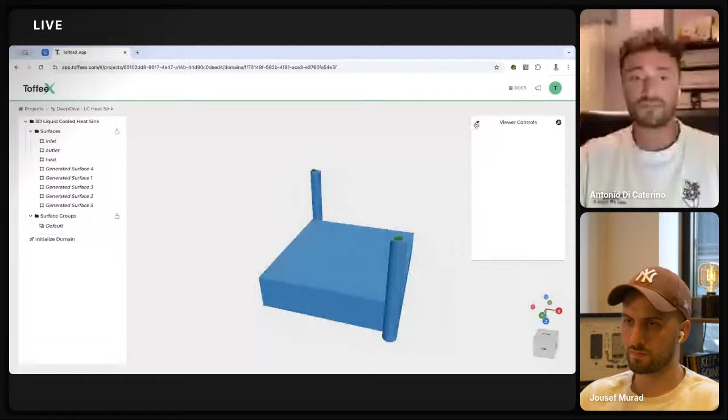As you can see here, I have two different domains and two different toolboxes. If I click on the domain, you will see that fundamentally what you need to provide as an input is a very simple shape. In this case, we are providing the outline of a liquid cooled heatsink, how it would look like. The domain that we have uploaded is fundamentally a triangulated mesh file. The input that typically needs to be provided into the software is an STL file, which can be exported out of any CAD system nowadays.

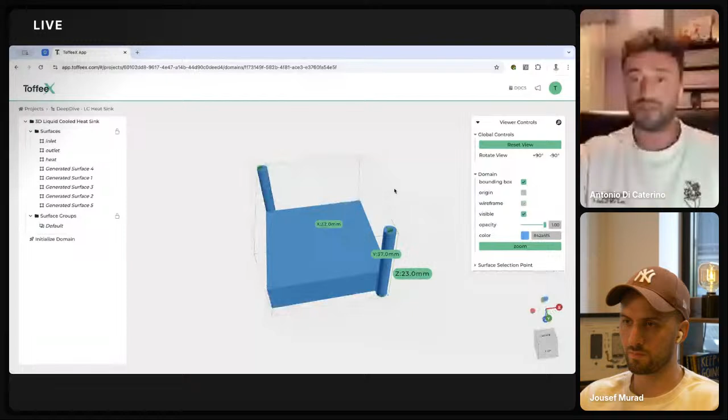Here you can see it's a very small geometry, smaller than 5 centimeters per side. So it's a very small liquid cooled heatsink to cool down a CPU. What we identified here are a few basic regions or surfaces that will be used to set up the physics simulation problem.

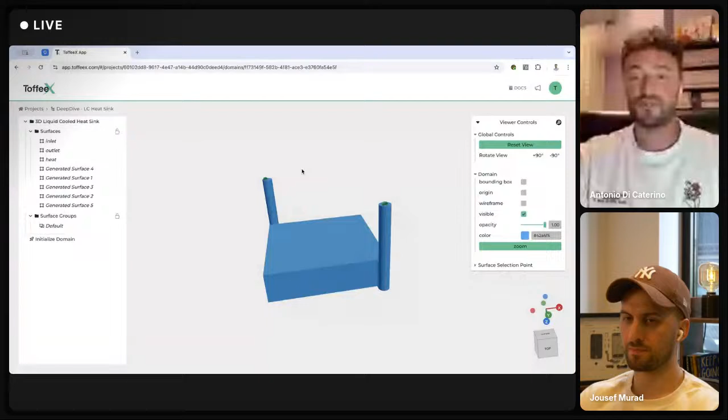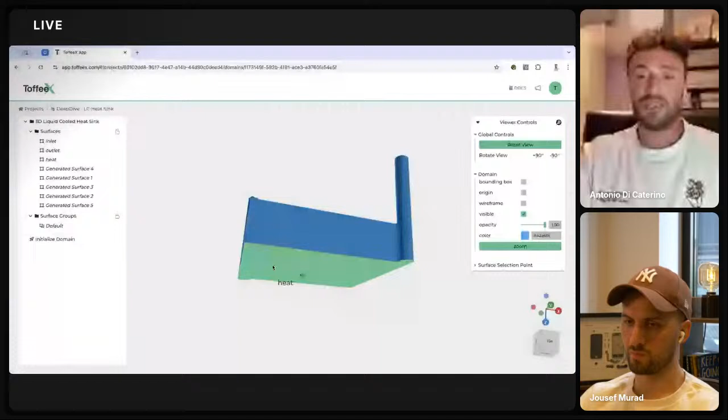As I was mentioning before, the software is physics driven, so we need to describe the physics to tell the software how the part is behaving, how it's performing, and to inform the optimization process to go in the right direction. In this case, we had to define an inlet region that you can see here, with the surface being highlighted, an outlet region on the other side, and then we also specified the region from which the heat is applied. In this case, the power coming from a CPU.

Once we have defined our domain, we go back to our project page, and what we have to do is build a toolbox. A toolbox is what I would define as the main operational environment within the platform. It contains all the tools that you need to perform either simulations or design optimization. To start, it's very simple. You click on create a new toolbox. You can give it a name, let's say deep dive toolbox, for example. And you select the domain that you want to use to run this design optimization.

Here you have some physics models that you can select. In this case, we will be solving both a thermal and a fluid problem, so you can select thermal fluid and click on create. I don't want to take too long to show how the creation of the toolbox and of the optimization works, but fundamentally what you have to do is create one run, which is a design run in our case, because we are expecting the software to output a design at the end of this process. We can give it a name, and we can set up settings for design, simulation, and mesh. Because again, the software is simulation driven, so we need an underlying physics simulation to inform our optimization process.

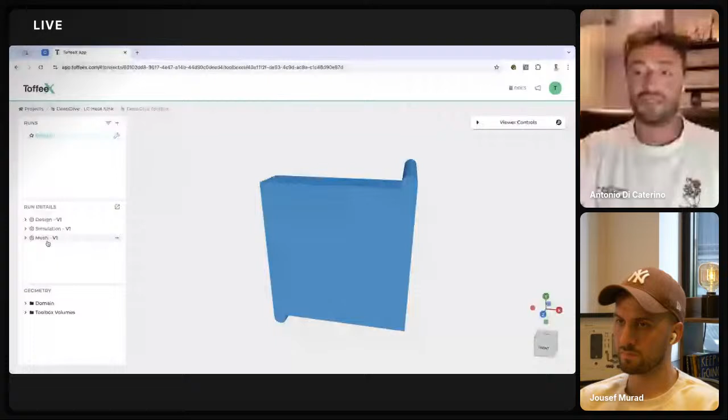Once you click on create, you will see that here on the sidebar, you have the option to fill in the run details. So all the parameters that you need to input to start the optimization process. And at the end, once everything is set up, you will be able to perform an optimization. So just very quickly, I would like to show you how this works.

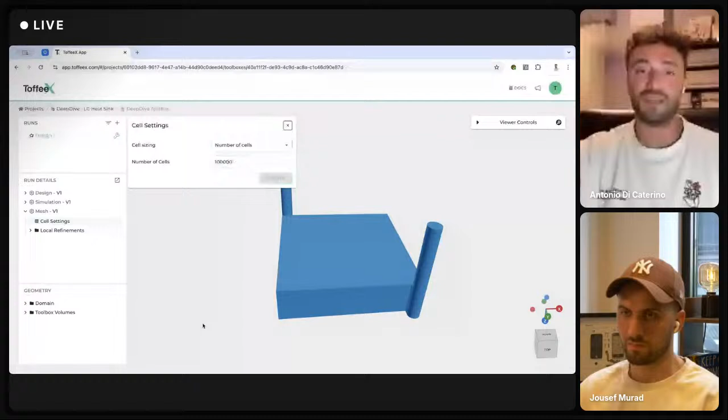So first of all, let's start with the mesh settings. It's the easiest one. Here we have to discretize our domain. So give it either a number of cells or specify a maximum cell size. In this case, let's keep it to default, just to keep it with the basic settings.

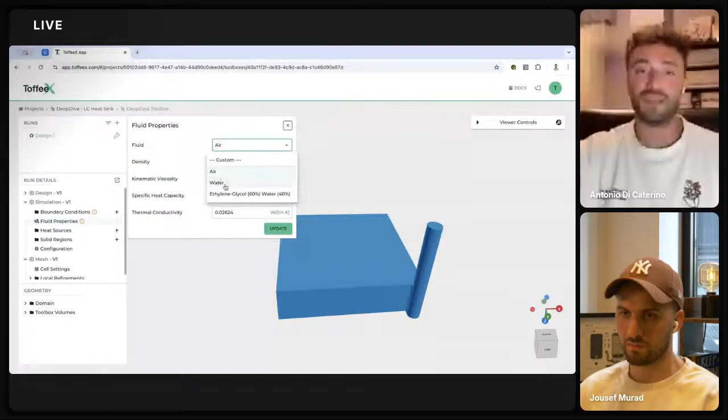Under simulations is where we define our CFD problem. So here is where we are specifying all the conditions that describe the physics we are trying to solve. So first of all, for example, we want to tell the software what is the fluid being used in this case. So what is the coolant that we're using. As you can see, we have a list of predefined materials or predefined fluids as well. In this case, just to again speed up this setup, we will select water as a process, and click on update.

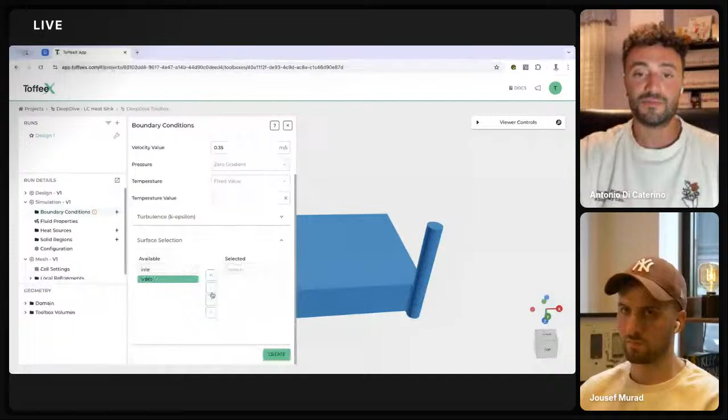For the boundary conditions, what we have to do is to define the boundaries for the problem. So, of course, we want to start by defining an inlet. Here it's very simple. So we can define the boundary, specify what is the velocity of the fluid going inside our domain, what is the temperature of the fluid going inside the domain. And then once we have identified the patch, we can click on create. This policy is what we follow also for the other boundaries. So in this case, we will define a pressure outlet. So simply identify the boundary.

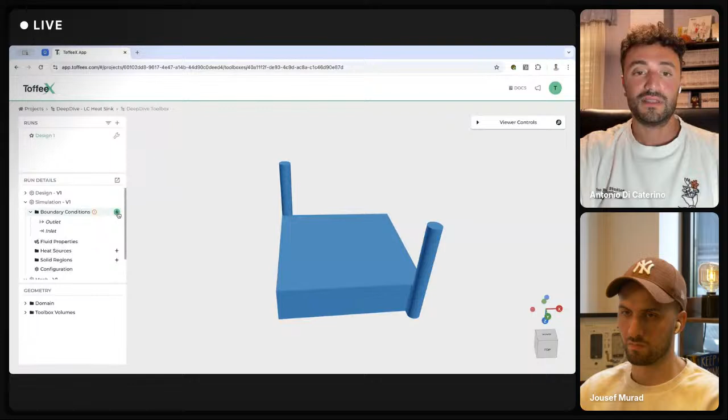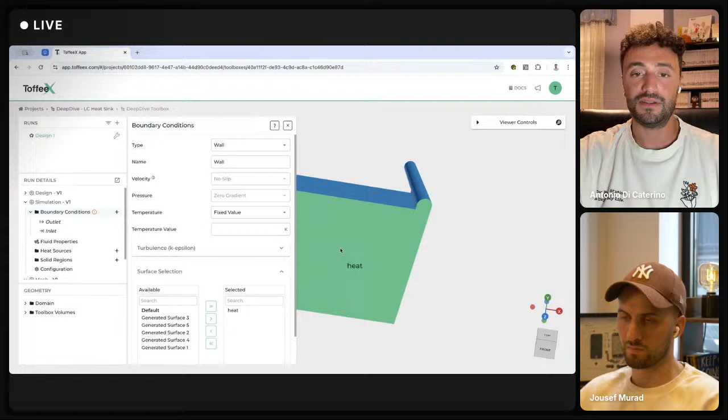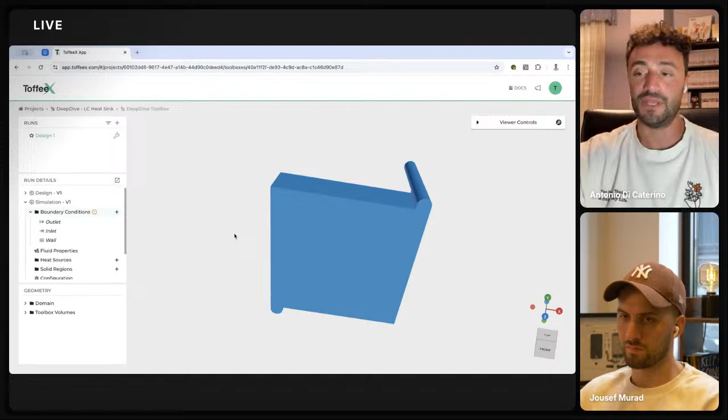Then we said that we are providing some heat, so we want to cool down this geometry. So what is the power we want to input? In this case, actually, I'm going to do something slightly different. So instead of providing a heat flux, as you can see here, you have the option to apply a heat flux, I will fix the value of the bottom surface that I identified before as heat, at a quite high value. The reason is that this could be, for example, 340 Kelvin to symbolize the maximum temperature that the CPU can withstand. So I might be optimizing in the worst condition possible, and then I can run the validations to see how this is behaving also for different working conditions. So this is one approach that you can follow.

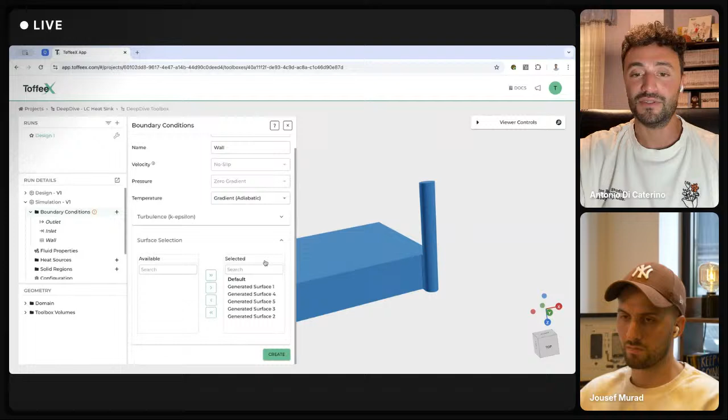The software is giving me this icon, so it's telling me that I still need to input a few more constraints, a few more boundaries. In this case, what it's asking me is to define the boundaries for the remaining surfaces of my domain. In this case, I will just use an adiabatic condition. So I'm making sure that the only heat transfer is happening between the heat provided into the system and the coolant that I've defined using the inlet here as a boundary.

Then we come to probably the most interesting part of the optimization. So here is where we define the settings for our design. As you can see, we have, again, a few parameters we have to always input for the software to successfully run a design. The first one is the material. In this case, we will be selecting a default aluminum and click on update.

And then on the objective is where we define how the optimization should be carried out. In this case, as we were mentioning, ToffeeX is a software to maximize the fluid and thermal efficiency of a device. So what we want to combine is something which is minimizing the pressure drops. So we want to minimize how much energy we need to pump the fluid through the system, but also at the same time to maximize the transfer. These two objectives are in contrast. The more you minimize pressure losses, the lower you can maximize the transfer, and vice versa.

So in this case, just to give a reference starting value, we will give 2 weights, the pressure losses and the transfer. So we are telling the software that we want to maximize the transfer. I give it a weight of 500, which is telling the software we want to give a higher priority on the transfer in this case. This optimization is a bit more complex than this, but of course, I don't want to annoy you with a longer explanation.

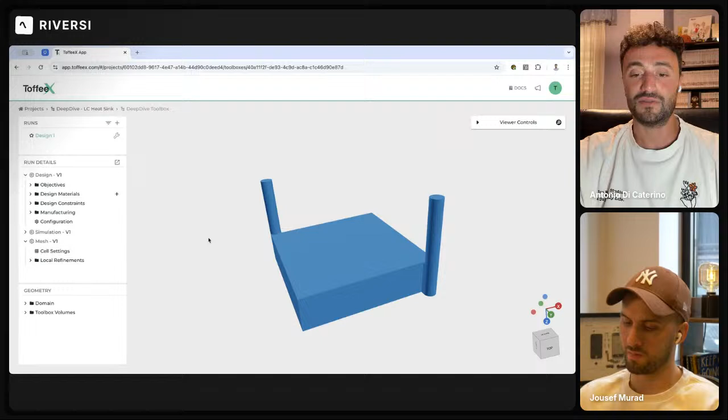One very interesting thing, of course, is that, as we were mentioning before, Toffee started as Toffee AM, and then we transitioned to ToffeeX. So the first part of the company, Toffee AM, was clearly symbolizing a strong direction toward additive manufacturing. In the beginning, the idea was to support companies using additive manufacturing to exploit the freedom that could be achieved using that methodology to bring to life more efficient components.

So the idea is that, okay, we have this great process, we have these great manufacturing capabilities, how can we exploit this freedom? But as we grew as a company, we realized that actually the market is moving in several different directions. Not all companies are adopting additive manufacturing. So we want to transition from AM to X. We want to extend our capabilities and also to open to, I would say, the unknown. So probably the X is symbolizing this as well. And we are opening now to several manufacturing processes.

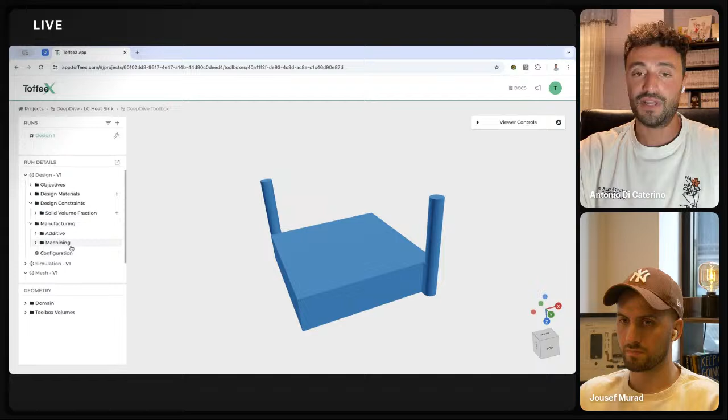The idea is that we don't want people to necessarily change the way they manufacture, but it's more about adopting new tools to change the way they design. So you have a manufacturing process. How can we optimize the output of this manufacturing process with a new software? As you can see, that's why we have these design and manufacturing constraints sections. Mainly, we are splitting them between additive constraints and machining. So we have these two processes for now, but we are adding more and more moving forward.

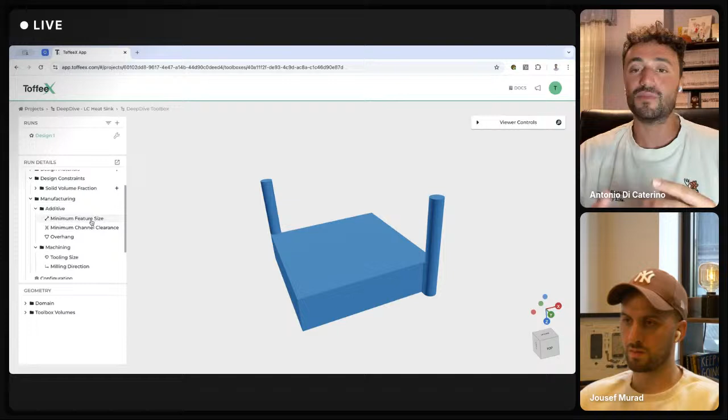Just to give an example, for the additive process, we can define, for example, minimum feature size. We know that additive manufacturing processes have resolution, so we don't want to get too small. That might not be printable, or, if we think about heat exchangers, when you have too small a thickness, maybe this would be a bit too porous, so you might have the fluid going from one side to the other, something that we want to avoid. So this is a feature we can control. We can define, just by enabling this control, what is the minimum feature that is allowable in the final design. Similar thing we have for the channel clearance.

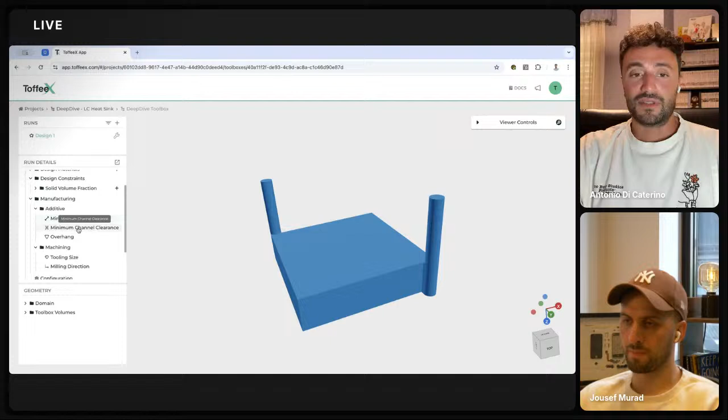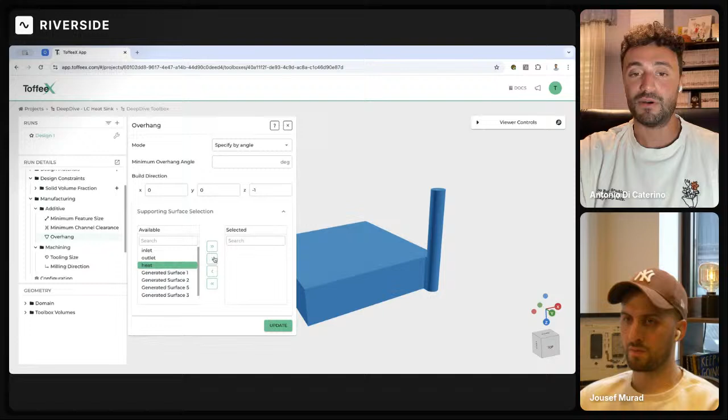We know depowdering is something quite critical for 3D printing, and of course overhang is probably the main thing. So we want to be able to specify a direction. In this case, for example, we could identify a build direction going to the direction of the negative z-axis, so we could say 0, 0, -1. Identify the bottom region, which is the one that is supported, and then we could specify, for example, a minimum or a maximum overhang angle. So we know that at the end of this optimization process, the software will not be overhanging above the value we specified.

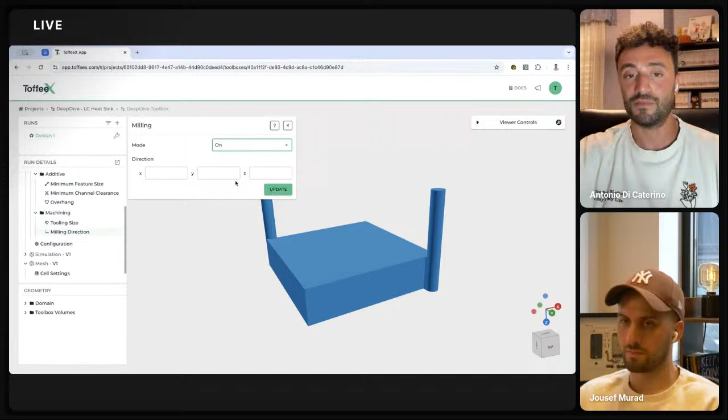On the other side, we have machining constraints. For example, we can identify a milling direction. And in this case, again, you can provide an axis to specify how the milling will be removing material from the block of solid that you are providing. Once everything is set up, you have a few additional things you can set up into the configuration, but very simple. You go here, you click on this icon, and you can select the computational power you want to allocate for the software to run the setup and the optimization.

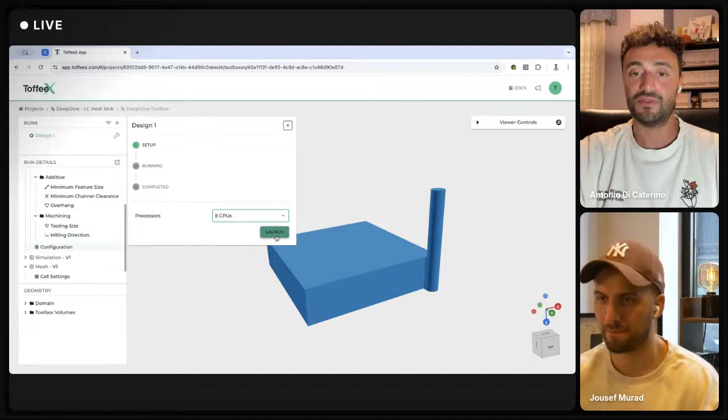In the menu, you have a few options, like select, for example, 8 CPUs. Again, these CPUs are not local, not something you have to own. Everything is happening in the cloud. We are hosted on Amazon Web Services. And once you click launch, the software will give you this menu telling you that it's running, good sign. Then it's going through the different stages of meshing, running the first simulation to initialize the problem, and then we start a design phase. So you can also keep track and follow.

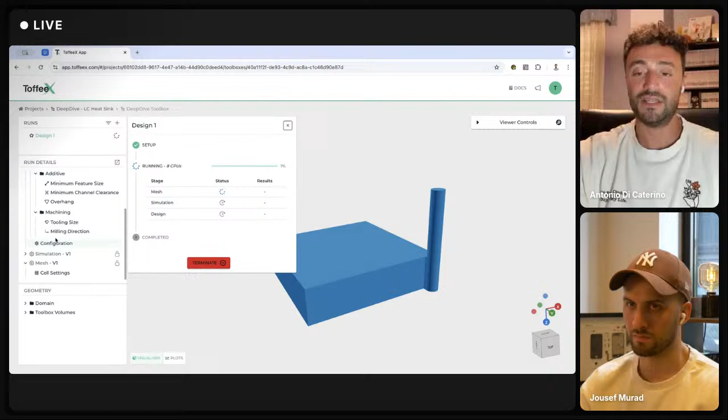Now, as you can see, it was very quick to set up an optimization. We only had to provide a design space, in this case, just the overall shape of the space we have available for the liquid cooled heatsink. We had to go through the setup of mesh, simulation and design settings. But what we are getting here as a result is a single design.

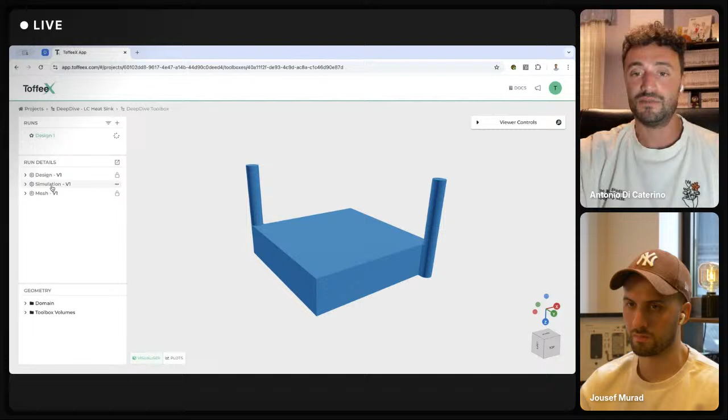Typically, what we want to do in this phase, when we are exploring the possibilities we can get with ToffeeX, the best thing is to explore a variety of different settings and parameters. This is very quick and very fast to do in ToffeeX. So, for example, here I have set up my mesh and simulation, and I'm happy with them. So I know that the simulation parameters will stay the same throughout the different design stages, and that's because these are my conditions. And I'm happy with the mesh resolution.

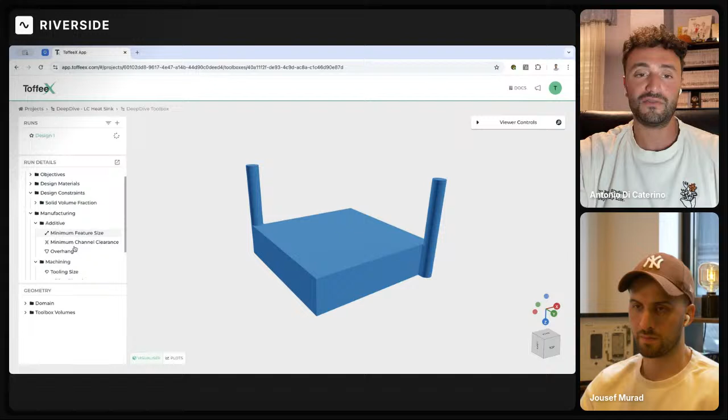What I want to change is, for example, the design settings. So I want to test, what if I use a different overhang angle? What if I use a different minimum feature size? What if, instead of additive, I go for manufacturing with traditional tools, so I go with machining? What if I use less or more material? What if I use different materials? So how can we quickly explore this broader design space? How can we, instead of making incremental improvements, start by generating a lot of designs, and then on the one that we like the most, keep on iterating just to get to a better optimum?

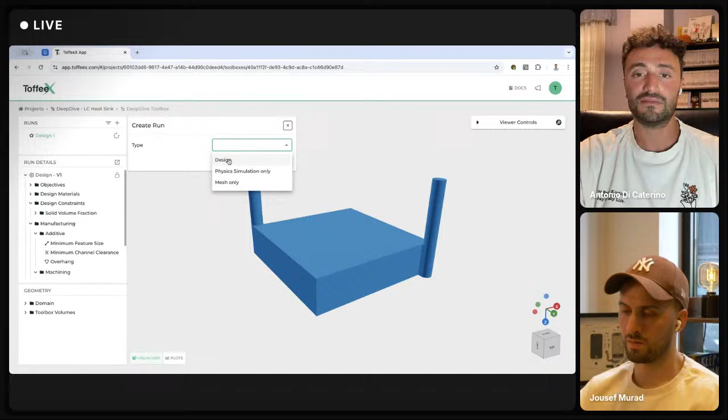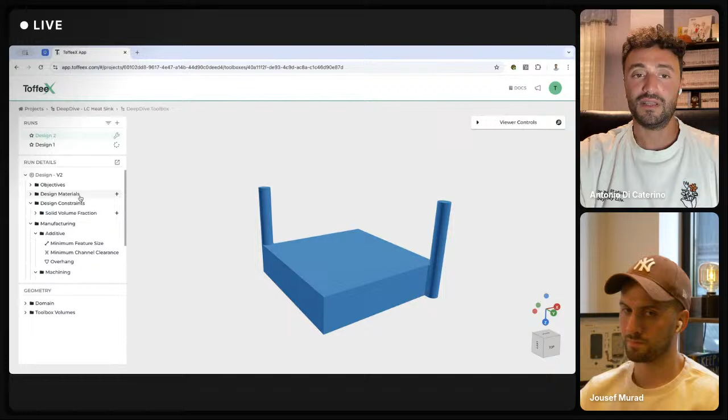It's very simple. What we have to do is to simply create a new run. In this case, again, a design. As you can see, the software in this case will give us the option to select and reuse pre-existing settings. In this case, we will be happy to reuse simulation and mesh settings while we want to change and duplicate design settings for the design itself. I will click on create, and the software will give me a new design. And as you can see, I won't be able to modify mesh and simulation parameters.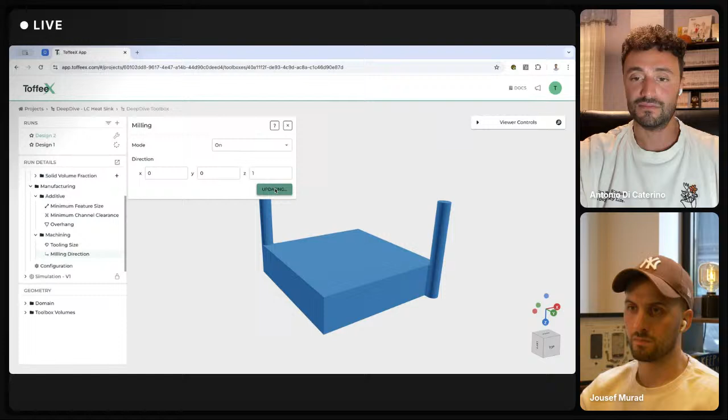They're fixed. So what I can do here is instead to change the output that I can get using different design parameters. In this case, for example, let's put the overhang constraint off, and let's instead enable the milling constraint. I want the software to remove material in this direction. So I have to identify the 001 axis direction, so removing material from top to bottom, and click on update. Very simple. I change one parameter. I go on the open run icon again and click launch.

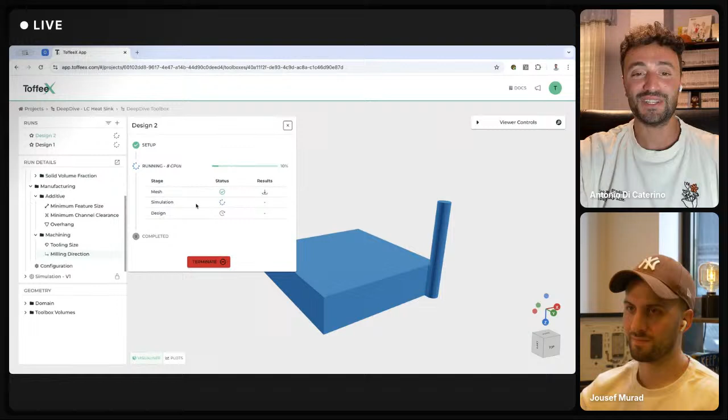So as you can see, the mesh before was completed, so the software is reusing the mesh settings. Unfortunately, the simulation wasn't done yet. Even if the software is very fast, it's not like a 3 seconds simulation. But then it's reusing the same settings to perform a new design. So here you can see how it's very quick and easy to explore a design space by quickly changing one parameter and getting to a new design solution.

Of course, I have already run some of these designs, so I want to show you the results of it. I'm probably going a bit longer on the time than expected.

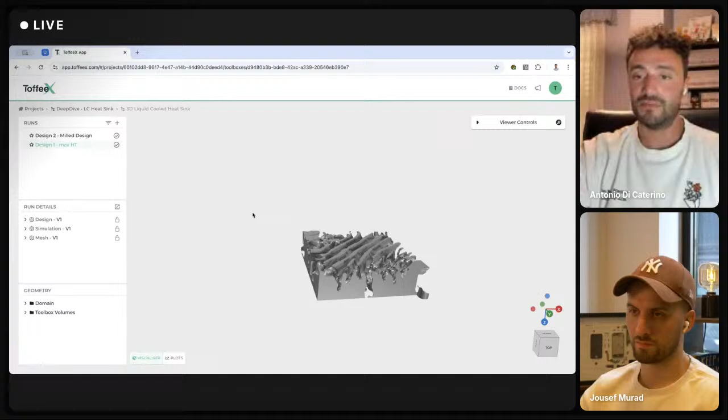But here we have two examples. So one is the maximization of the heat transfer without any constraints applied. You can see this is the structure that the software is giving as an output. So this was the starting point we had, similarly to what we've done so far. If I go in wireframe, you will see that this is the internal structure the software is building, and you can also visualize the fluid region.

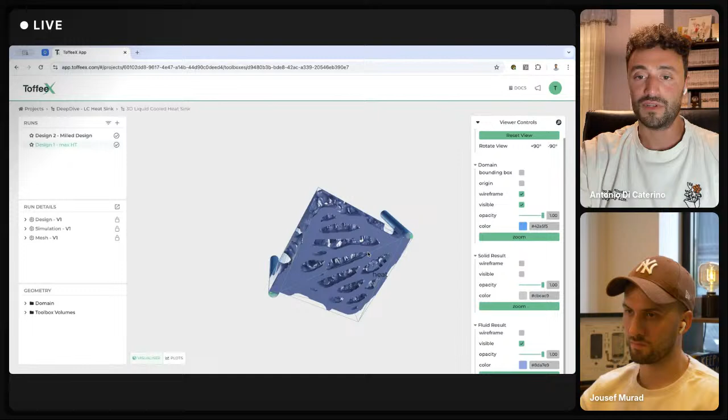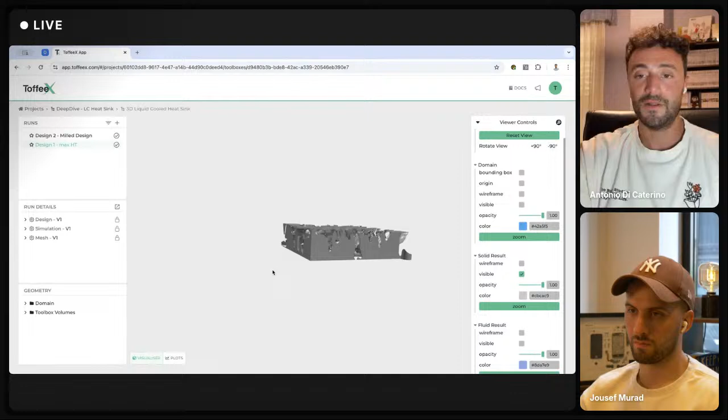So you can see how the software is splitting, let's say, the fluid coming from the inlet to the bottom of this bottom region where the heat is applied, to maximize the heat transfer and to cool down the structure as efficiently as possible. The result I'm showing you is without any constraints on manufacturing, so kind of giving 3D freedom to the software.

But if we look instead at the design that we got by milling, we can see for the same parameters, so same ratio of pressure losses with heat transfer, that we have a completely different design. In this case, the software is carving out material from a block of solid and giving us a result which is at this point manufacturable by milling.

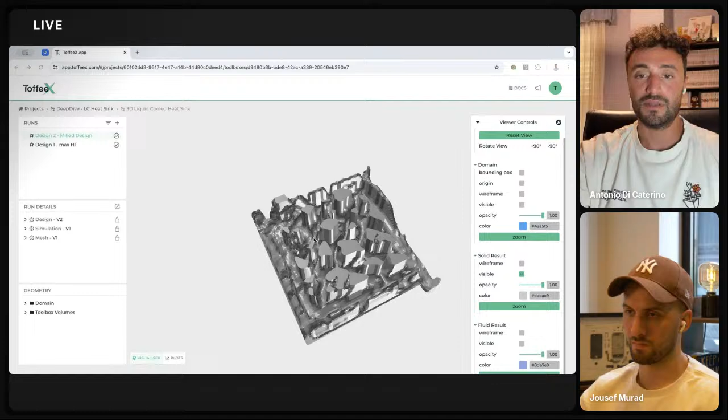I would like to actually share these results very quickly in ParaView, which is a post-processing tool we typically use. So I might be sharing the screen again, just very quickly. And let me go back to the screen.

Okay, it was at the bottom. Here we go. So here we have a comparison of these three different designs. On the extreme right, we see the baseline design. So what was done previously, what we could design by just using our invention and our ingenuity. So in this case, a classic M-shaped channel to cool down the CPU at the bottom.

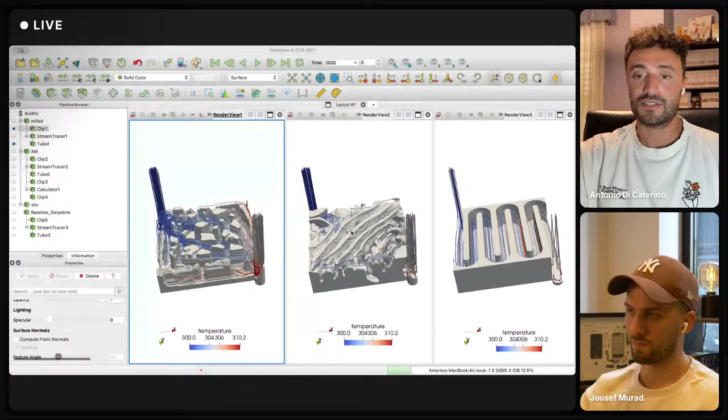In the middle, we see the structure that is being optimized with a kind of unconstrained approach, so without taking any manufacturing constraints into consideration. And here instead, on the left-hand side, we are including the manufacturing constraints of milling. So you can see the streamlines, how the fluid is moving into the different structures, and also we can have a look at how this behaves.

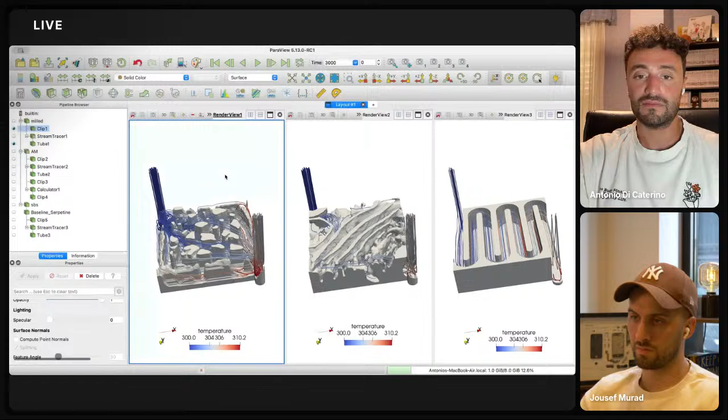So if we visualize the temperature at the bottom of each of these devices, here, for example, you can see that we have a maximum temperature of 310 Kelvin. If we go to the optimized region, which is slightly more unconstrained, we might be expecting a slightly lower temperature. So you can see from the legend, slightly lower. And if I rescale on those values, we see roughly 1 degree colder.

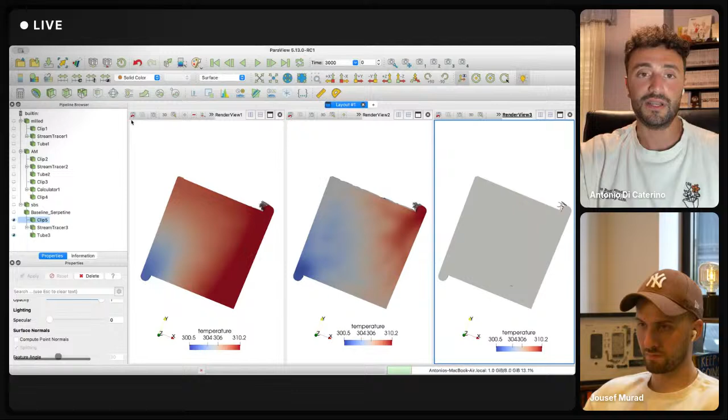And finally, we have the serpentine design. Again, let's plot the temperature for this one. Let's rescale. And you see 314, quite a non-uniform distribution for temperature. So we can see how effectively the software is giving a design which is optimized, which is behaving better on the heat dissipation.

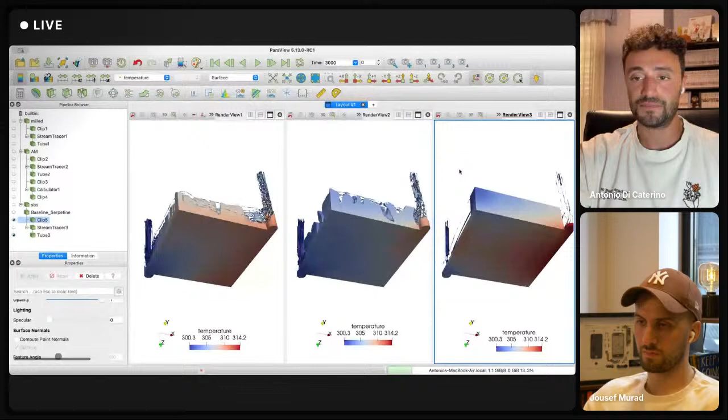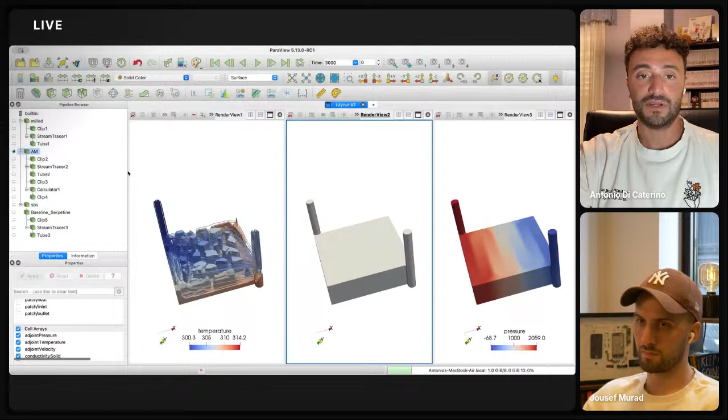But also, if we have a look at the values for pressure, we will see that we also have the same pattern where, for pressure, we have a value of almost 2000 Pascal. This is a small device, just to remind you. In the AM case, we have a value of, lower, 243, and a similar value we are expecting also for the milled geometry.

So yeah, this was a pretty quick overview, but it's showing you the difference in the designs that you can get in ToffeeX very quickly by only changing a few parameters. You can tap into a very vast design space, so you can pick up several alternatives. So you are not limited to a design cycle which is incrementally improving on something that was either pre-existing or something that you had to come up with from scratch, and then you had to run a lot of validations.

So to see what was working, what was not, and then to slightly improve and modify until you reach a convergence to satisfy the requirements. So this saves a lot of time. So in a few hours, if I go back to the software, you will see this design is taking roughly 1 hour for the set of parameters we selected.

So it's really quick to get to different designs, different shapes, and then based on the results you get, it's a first iteration, you can also refine until you reach a convergence where you are satisfied with all the results that you're getting at the end of the process.

And of course, this is done not anymore in months, but it's taking just a few weeks. So we have testimonials from customers going from the conceptual design to actually manufacturing the design in 2 weeks. So it's really powerful. And we believe that it is a great tool to start integrating into the design workflow.

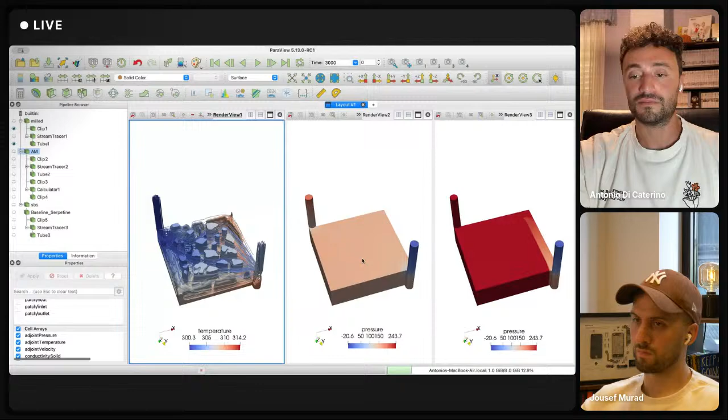Really good. So yeah. So excellent. So now it's time for the questions.

We had one question from Ant in the comments saying, can ToffeeX provide design optimization for structural and FEA problems as well? Or is it only restricted to CFD and thermal? For now, it's restricted to CFD and thermal. So we have constraints that we can include to account, for example, for the minimum thickness of the part. So maybe you know that your design can't withstand pressure loads unless it has a minimum thickness. That's something we can control.

However, we are not performing structural optimization. The main reason is that we believe our product is quite unique in what we do, and this is our main selling point and our main strength. There are so many players in the market doing structural optimization, and there is no reason to compete with them.

In our future, in the vision we have, the reason why we will start implementing structural topology optimization is when we start looking at fluid structure interaction, to give a more complete optimization. But at this time, we are offering only fluid and thermal optimization. I think that makes sense. Also a strong positioning from your side to try not to be a jack of all trades, which is good.